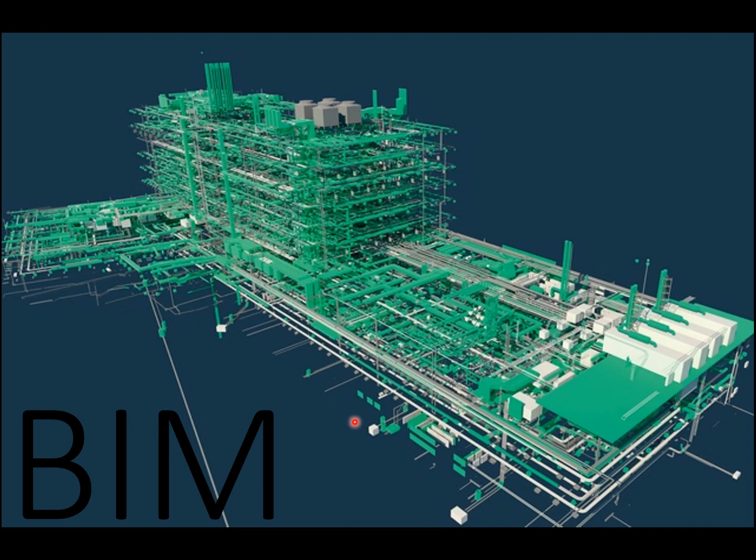So the main thing is just a couple of background things that we need to look at, which you would remember from your first year, where we started out with the origins of the quantity surveyor and how it spread out of the master builder functions, basically, where quantity surveying is actually a specialization of the architecture profession as it developed later on.

The client started to request quotes beforehand from contractors. Contractors started colluding, and then clients started to catch on to that, and then appointing independent QSs to manage that, to check whether the quotes that are supplied are actually in line with what is being presented.

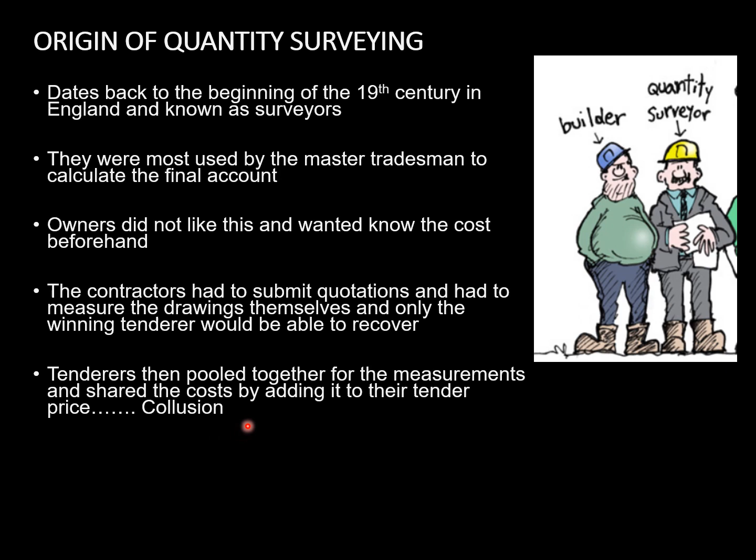So just a bit of background on that, and then the finalization of that.

That's just a bit of background, but the main thing is we've always been working on BIM and building information modeling per se, and it's just the maturity levels that differs from where we used to work on paper-based type of architecture drawings, getting digital drawings and getting 3D models to measure from, etc.

Now, architecture is mainly the forefront with any design process, because they are the visionaries of whatever building is going to be constructed. Similarly, the engineers are the visionaries of any civil construction that takes place.

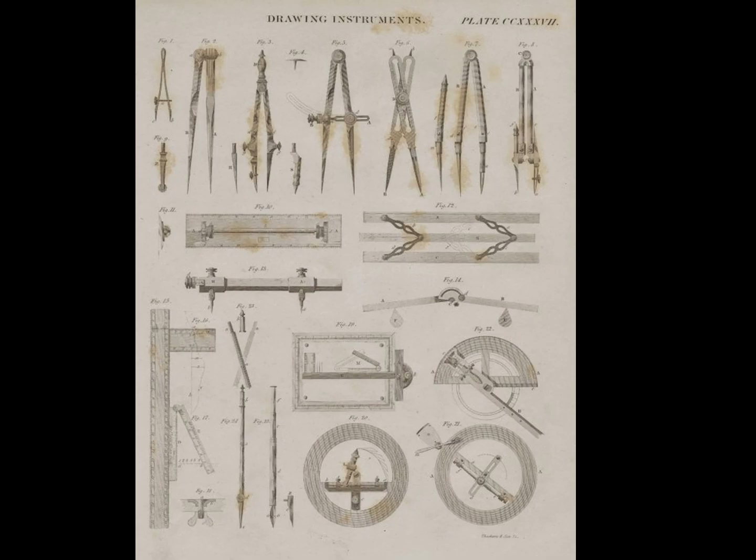So they had quite a few tools that also developed over the years and were utilized, and this is typical of the details that would have been produced.

But the problem with this was that making any changes had a big impact on the process, and any amendments also caused a lot of problems down the value chain.

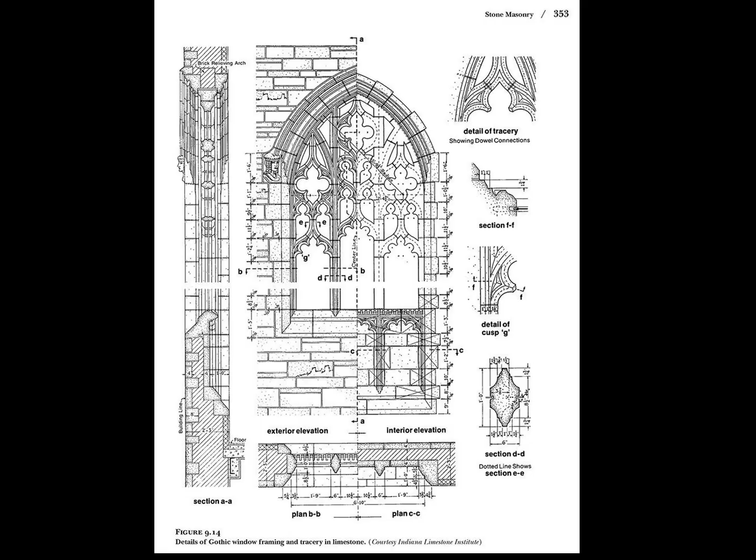The way that models were presented was time-consuming hand construction, cardboard cutouts, etc.

I just mentioned to the residential class that the architects still do the same design of model production through construction of physical models, still for that hand-eye coordination and looking at the design, building it basically from scratch just to learn the process.

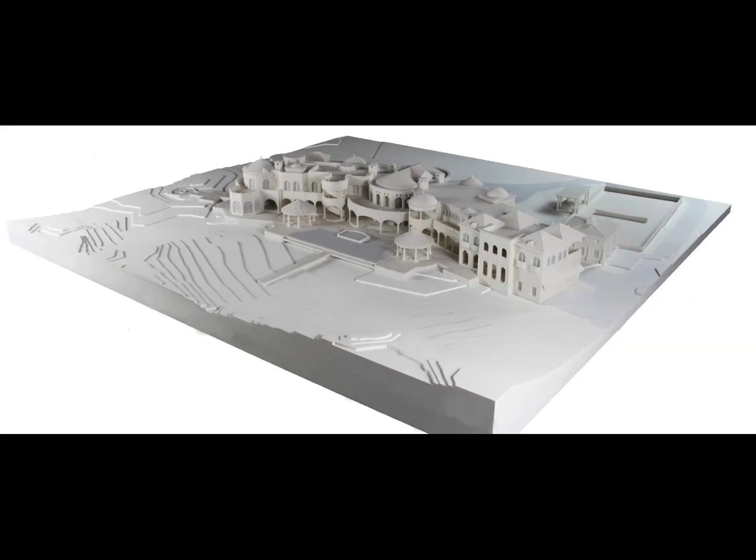Similarly, we do the same when we teach you how the measurements work and everything, because most of the programs that we use are based on these principles, and we found that understanding these principles is much more important than actually knowing the actual software, because if you know the underlying principles, the software can easily be learned. But as we progress and as the programs get more user-friendly, this process can shift slightly to the other side.

You will see that I just included some highlights of what the potential is of BIM. The visualization side is where you can have clash detections, etc.

So the short and the long of building information modeling is that there is information produced by one stakeholder, then transferred to another stakeholder,

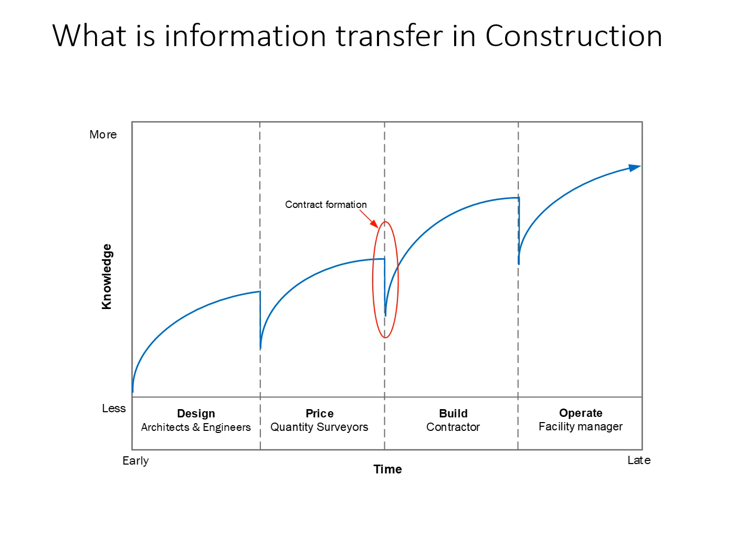Now we know that manufacturing is a different process because it is the same product that's produced over and over again. It's not like construction where we have a new product produced each time, which just places a little bit more emphasis on the transfer of information.

Also, on construction, it's every time a new team that's put together to actually transfer and do the necessary designs.

So for this section of the study material, the main thing that I want you to understand is that we've got different maturity levels, where maturity level 0 is still mainly CAD based or hand drawing type of technologies. We still use quite a lot of CAD drawings that are usually supplied by architects to QSs or construction managers, etc.

There has been some progress in that aspect, especially engineers, for instance, that use Revit or other designs like Civil 3D, which assist them in the actual design process. Architects use other programs like ArchiCAD or Revit as well, which usually assist in the visualization of information.

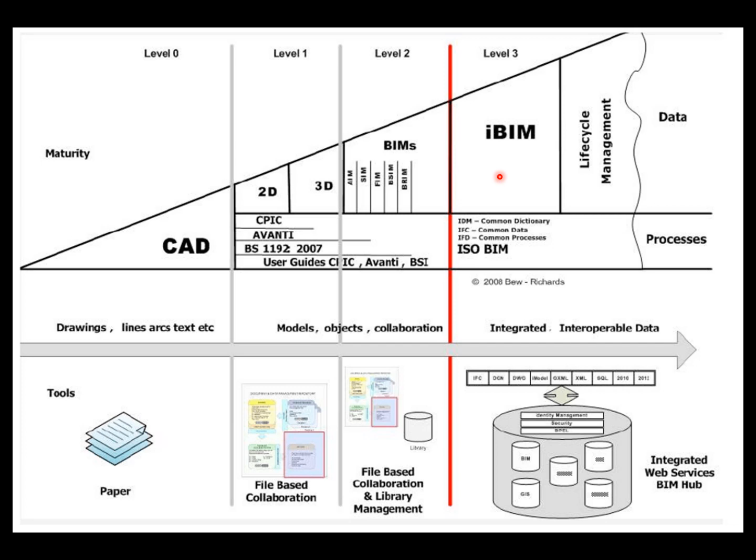Then this is just another visualization which also assists - we have BIM level 0, mostly paper-based drawings, CAD drawings, then going over to a 3D visualization, and then finally going up into a cloud type of BIM environment where everyone does their part on the model.

And then secondly is the integrated feedback between the physical and the digital.

Okay, then the other thing that I want you to be able to understand is, yes, we've looked at the BIM maturity levels, but it differs from the BIM project lifecycle, where you would have a typical program or design on a BIM model and have the conceptual drawings done, then the detailed design is still done on a 3D model visualization platform. The analysis, everything takes place on that platform.

The documentation is pulled from this model, and then manufacturing takes place after that, and then 4D BIM and 5D BIM, on which I'll expand a little bit later on, is then based on where the actual construction takes place. The construction logistics is then also planned using the BIM model, and then the operational management and maintenance is then conducted on the BIM model together with the physical structure that has been built.

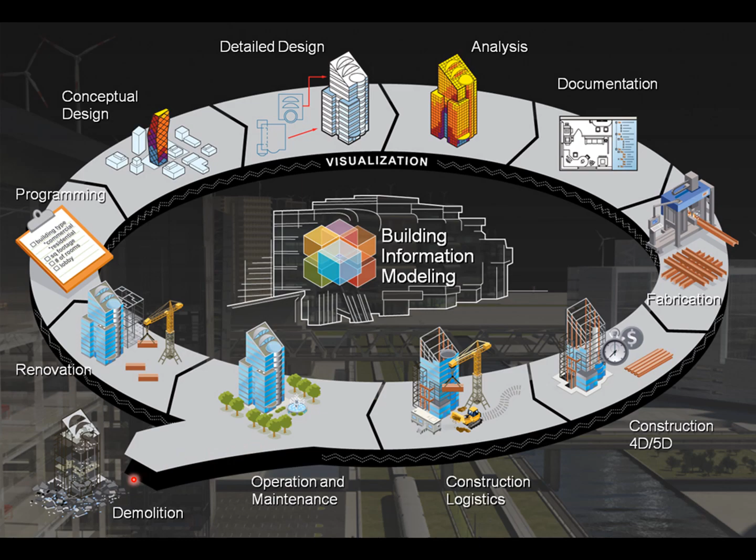Something which is left out here, this will be 6D BIM. And then any renovations will then take place, or the design can be used for that, or then the demolition of the asset.

So then the other thing that you need to be able to convey to me is that you understand that 3D BIM is mostly concerned with the architects or the engineers, the actual design of the model. 4D BIM is where you've got the construction managers or construction project managers that does the programming based on the model. And then 5D BIM is a quantification from the BIM model. And then 6D BIM is the life cycle planning, which is the facilities managers, etc.

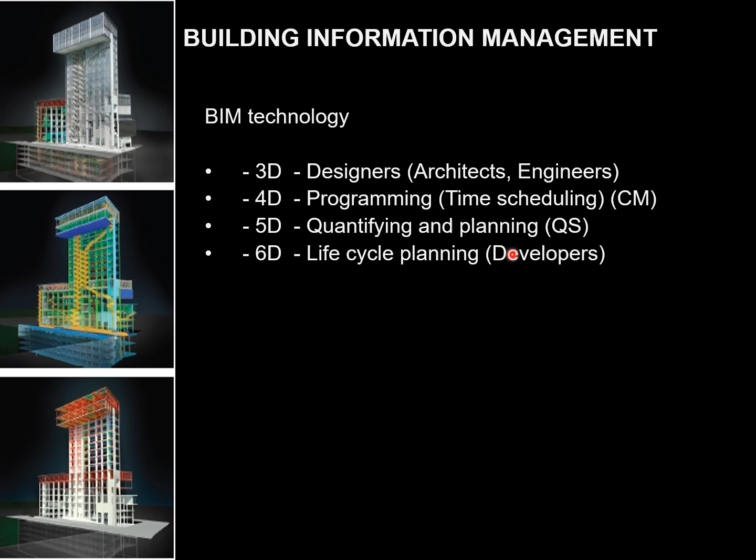Then I've just added a couple of videos. We watched the one video, the first one in class, and it just relates to technology and how it has progressed - items that we haven't really realized yet, but has revolutionized the way that we conduct our business. For instance, PDFs, how they revolutionized our way of transferring information to site and from site on drawings, etc. Even just stitching a tender document of 600 pages together on one PDF was a major step forward for the construction industry.

Okay, and then I just included two other videos here, one relating to 4D BIM and 5D BIM as well, which just gives you a bit of background on the differentiation between those two. And then I included the hype graph for the technology.

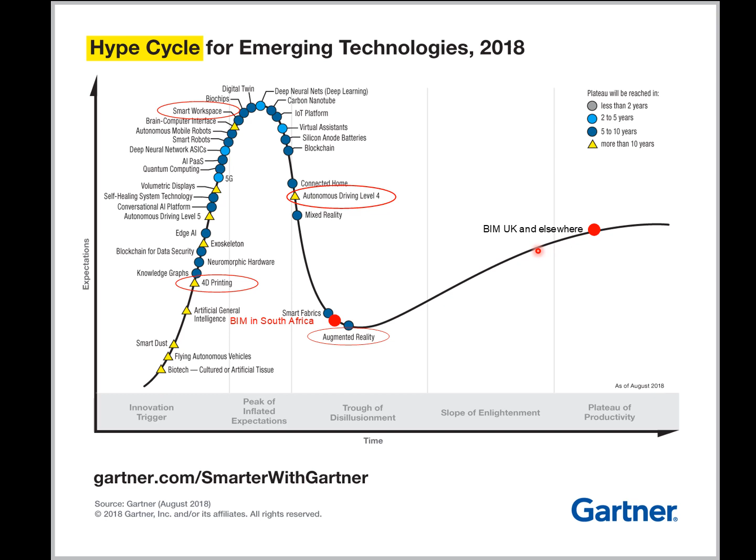Then what I included here is construction 4.0 type of technologies and the big influence that BIM will have on these technologies. This is from Sawhney, a book published in 2020 on construction 4.0, or the fourth industrial revolution type of technologies for the construction industry.

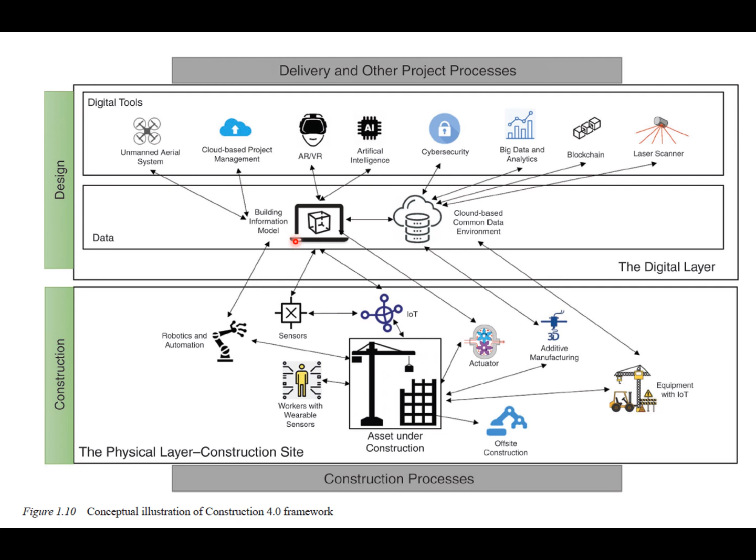Then I also included a picture of how BIM serves as a catalyst, or a middle man if you want to call it that, between construction 4.0 type of technologies on one side, which we have digital design, which influences the BIM model, which is then taken over to the physical construction area. This is quite an insightful diagram showing how pivotal building information modeling can become in the future.

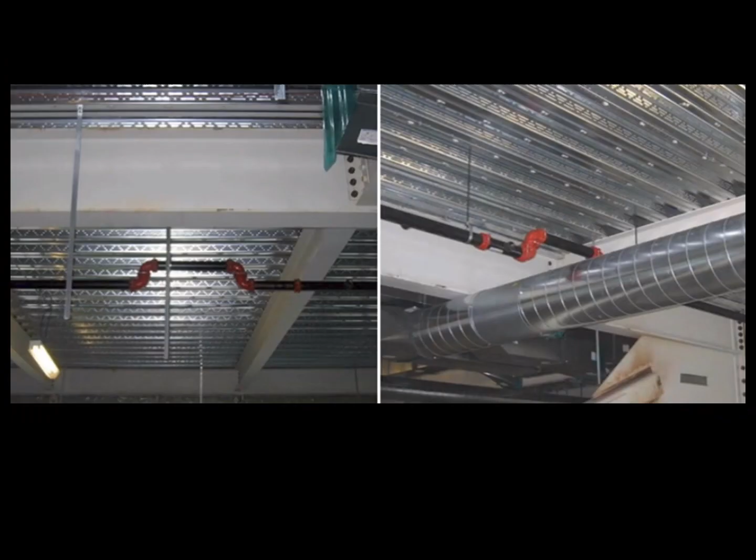So the big advantages, of course, during the design process is clash detection and finding challenges between the different trades beforehand, the quantification thereof, etc. You can just see some practical examples of clash detection that assisted where the plumbing installation was done, allowing for the air conditioning to actually run underneath the existing design.

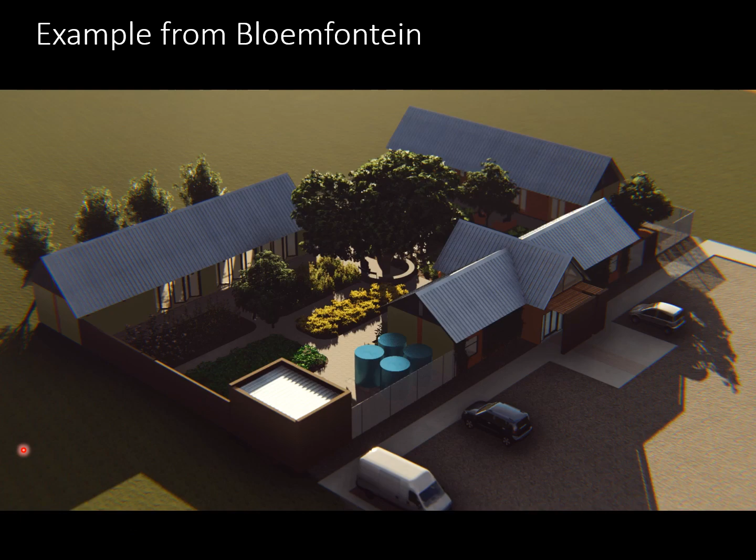Then this is just a project that we worked on recently here in Bloemfontein. This was just a visualization. I don't know if this will actually play. Let's see if it can play. Oh no, it didn't want to play. So it was just a representation, but it's a typical example of what we're currently getting. We're getting a lot of nice 3D designs from architects, but it doesn't have real information behind it. The previous picture was actually a nice panning shot of the entire project, just looking at how it will look on site.

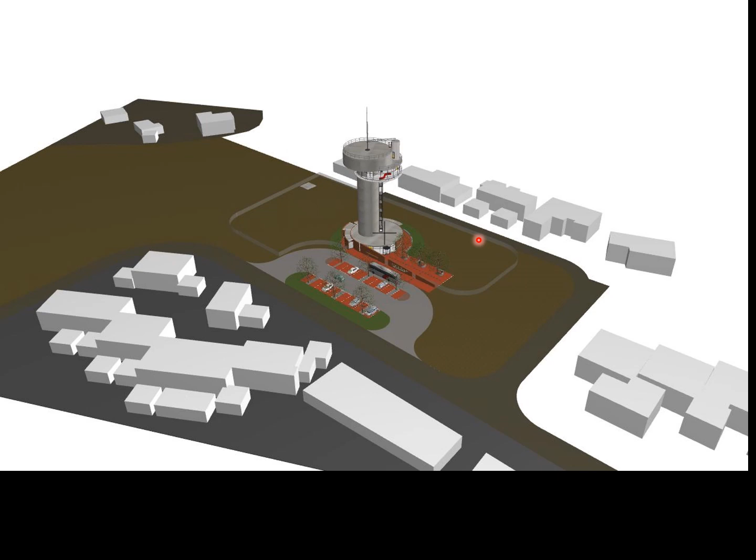Then I also wanted to show you this representation. This is quite old, actually 8 or 9 years old. It's a project that we had here in Heuwelsig, a planned pressure tower, and the visualization actually assisted us quite a bit in seeing how the shadows would be cast over the adjacent or surrounding buildings on top of the hill. But still, it showed us a lot of detail on the design, and gave a lot of perspective on what we had to measure.

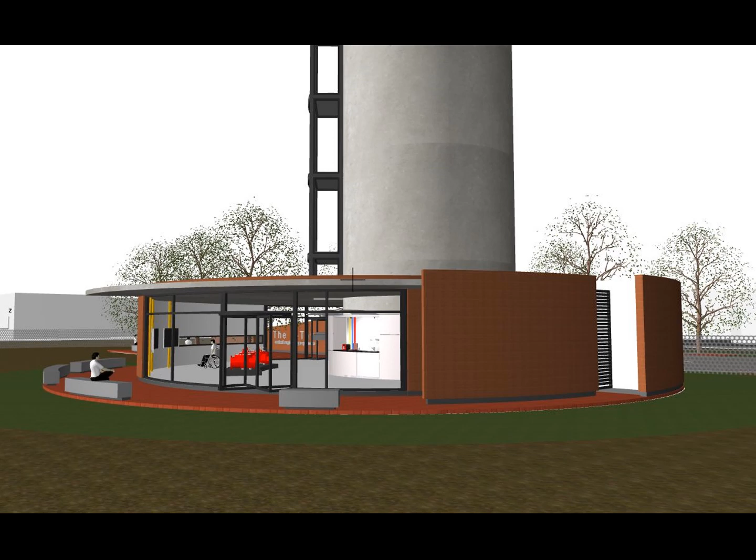And we were quite excited about it, and we actually got CostX, or the Dimex version for South Africa, for the 3D design, 3D quantity tables. But when we actually got the information, it was still just objects that had to be converted back to 2D drawings to actually do the actual work. So this is just basically the mention of that.

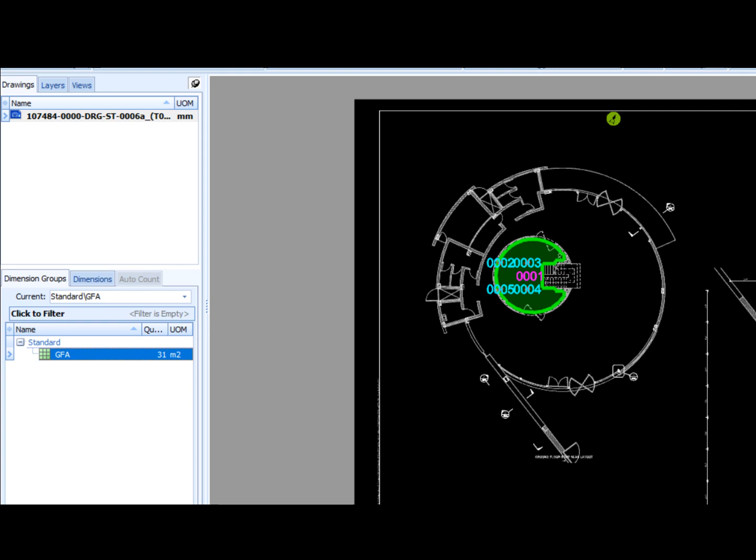So, in a nutshell, on 3D BIM, what I want you to understand is firstly, it is not a technology, it's a combination of technologies, with different people working on different sides. We've got different motivations. We don't have government coming in and making policy to have certain standards at a certain time, which is one of the big barriers for South Africa. Secondly, I want you to be able to distinguish between the BIM maturity levels, the project life cycle, and the different role players on BIM.

So I want you to recognize that 3D BIM is mostly for the design, 4D BIM for the programmers, 5D BIM is for the quantity surveyors, and 6D BIM is for the facilities managers. I want you to specifically be able to convey the difference between those factors.

So I hope this has been helpful, and please let me know if you've actually worked on a BIM project, or have been using these types of technologies in the specific areas that you work in. It would be interesting to hear from you. Thank you very much.